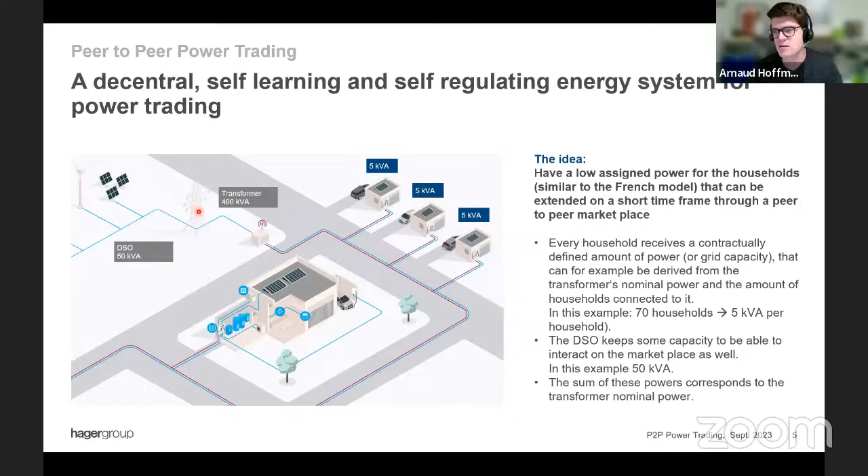And what we do now is that we install a marketplace. And as soon as one of the households needs more than those 5 kVA, this household needs to buy additional capacity, either from the DSO, if the DSO decides to use its power to put it on the marketplace, or, and that's the situation that is actually a little bit more interesting, from the other households.

So in this case, what happens is that you will have the ones who really need more network capacity because they afford a whole set of loads that need to be run. Those are the ones requiring higher network capacity. Those are the ones who will need to pay for this, and they will pay it to their neighbors who are able to reduce the required capacity. That's the basic idea that we put behind.

And of course, if there's no one selling capacity and I need capacity, either the DSO can jump in, or if that's not possible, well, that would mean that this household needs to do some load shedding by switching off an air conditioning and electric vehicle charging or whatever it is.

So a load manager would be, let's say, mandatory. Now, because this load manager will probably be the one doing all the transactions on the marketplace. We don't see this done manually, of course. This is something that needs to be run automatically by a load manager.

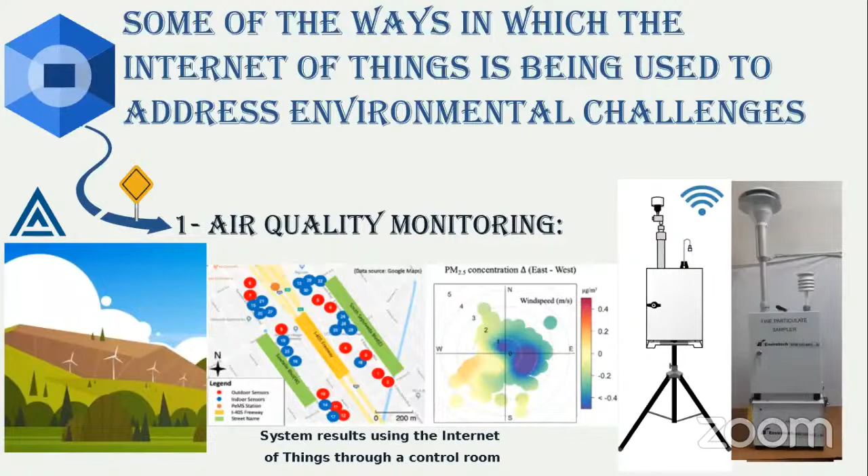هنا نحن ممكن نقوم بعملية أخرى بالتطبيقات اللي هي إدارة المياه. واحد من المشاريع الأخرى اللي تم إنتاجها هو جهاز يعمل وفق إنترنت الأشياء بمراقبة جودة المياه بالأنهار والبحيرات والخزانات، بما فيها الخزانات المنزلية، باستخدام عدة تطبيقات.

لذلك قمت بإنجاز وبناء جهاز يقوم بقياس معلومات مثل مستويات الرقم الهيدروجيني والأكسجين المذاب وعكارة المياه. قمت ببنائه لصالح مؤسسة دائرة المياه والمجاري عندنا في البصرة، واللي ساعد بجمع معلومات في الكشف المبكر عن تلوث المياه وتسهيل الإدارة الفعالة للموارد المائية.

عندما يمر الماء عبر الحساس فإنه يمر وفق الملف اللي تم وضعه داخل الأنبوب. كل تمريرة تنتج نبضة كهربائية، ومن خلال حساب النبضات في فترة زمنية معينة وحساب قطر الأنبوب المستخدم، يمكن حساب حجم المياه المتدفق عبر الحساس نفسه، واللي يقوم بإرسال كل نبضة للوحة التحكم.

قمت بتطوير هذا الابلكيشن باستخدام الـ iOS على الـ Xcode لتصوير البيانات وتنسيق رسم بياني دقيق، عن طريق الاتصال ببوابة الأمازون API Gateway اللي تعرض وظائف الـ AWS Lambda لجلب البيانات المطلوبة لعرض كل رسم بياني.

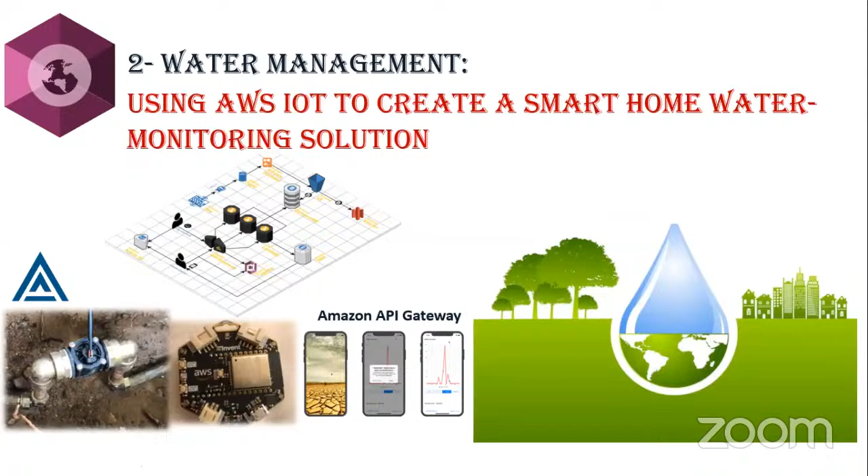النقطة الثالثة اللي نتحدث عنها هي إدارة النفايات. واحد من المشاريع اللي تم إنتاجها على شكل نموذج وليس تطبيق حقيقي هو مشروع سلة المهملات الذكية بالشوارع، تعمل وفق الطاقة الشمسية. وأخذنا بأحد المشاريع المركز الأول بأحد الجهات والمؤتمرات اللي شاركنا بها.

الطريقة التقليدية الحالية لرصد النفايات يدويا في صناديق النفايات أمر بالغ الأهمية وغير مريح، يتطلب المزيد من الجهد البشري والوقت والتكلفة، وهذا لا يتناسب مع التقنيات الحالية اللي نطمح لها لعام 2050. ولأن عملية إدارة النفايات من القضايا الحاسمة بإنشاء مدن ذكية، وبظل النمو السكاني الهائل، أنجزت بناء وتصميم

صندوق كبير للطرق تم تنفيذه لصالح مؤسسة كنموذج أولي، مثل ما ذكرت في البداية، واللي يتميز بنظام فتح باب ذكي.

ونفس اللحظة بنظام التصنيف الصوري للقمامة باستخدام التعرف الصوري، ونظام التلوث والبث الصوتي، بمعنى أنه على سبيل المثال لو اقترب شخص من الصندوق وحاول أن يرمي فيه راح يصدر صوت يقول اعتني بالبيئة.

وأكيد ما نسيت أن النظام يعمل بالطاقة الشمسية وتقنيات الضغط التلقائي الذكي، واللي يحل مشكلة قيود سعة سلة المهملات العامة. ومن النقاط الأساسية اللي استخدمتها نظام التعقيم الذكي، واللي يعمل على إزالة الروائح الكريهة والتعقيم وفقا لإعادة الصحة النظيفة ووضع أساس متين للصندوق.

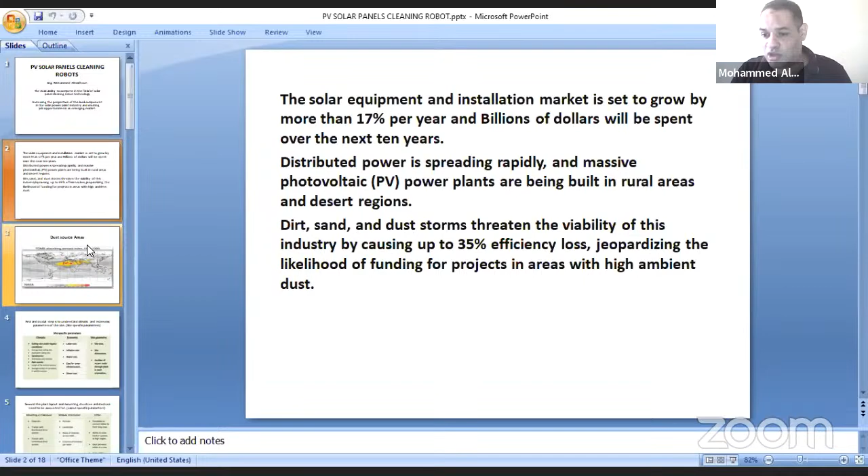فكان بنظرة سريعة على الوطن العربي بنلاقي إنه حسب الدراسات، أحسن مكان في العالم للطاقة الشمسية هو خط حزام الوطن العربي وآسيا. بس المشكلة إنه بيكون فيها غبار وأتربة كبيرة جدا، وهذه المشكلة بتأثر على إنتاجية الطاقة في المحطات اللي بيتم إنشاؤها في الوطن العربي أو شمال أفريقيا ومنطقة الخليج.

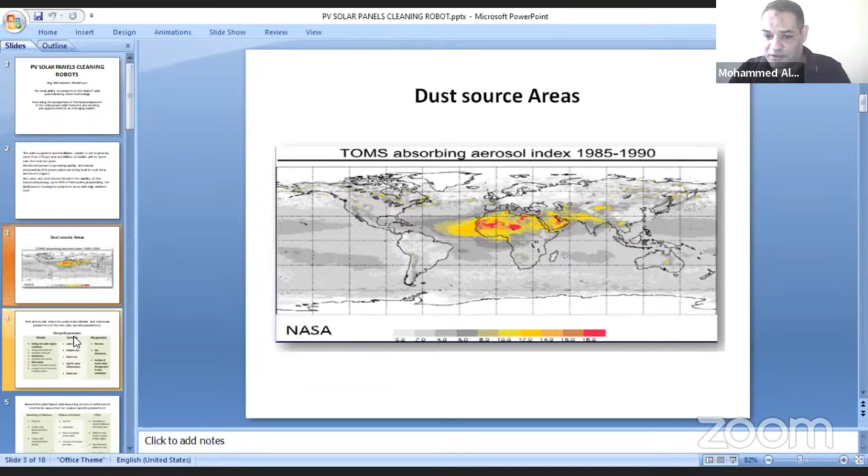وحسب الدراسات اللي بعض المعاهد والمؤسسات الدولية عملتها زي ناسا، كانت بتتكلم على أماكن انتشار الغبار والرمال. فكان نصيب شمال أفريقيا والخليج حصة كبيرة من انتشار الغبار والأتربة، باعتبار إنها أجواء فيها صحراء كتير.

بالنظر على إنشاء محطات الطاقة الشمسية، بنلاقي إن في عناصر أساسية يهتم بيها مصممو المحطات، وهي الطبيعة المناخية والطبيعة الاقتصادية وطبيعة الموقع اللي هيتم فيه إنشاء محطة الطاقة الشمسية.

فلو بصينا على الطبيعة المناخية، زي انتشار الأتربة والغبار في المكان، والعواصف الرملية ونسبة تكررها في العام، ونسبة هطول الأمطار اللي بتساهم في تنظيف الألواح الشمسية من الأتربة اللي بتتراكم عليها أثناء العواصف الرملية أو بشكل دوري يومي من الغبار اللي بينتشر في الجو.

والنظرة الاقتصادية بتكون تكلفة العمالة في التنظيف ومعدل التنظيف، عدد مرات التنظيف، تكلفة المياه، ووفرة المياه المستعملة في التنظيف. فبالنظر إلى هذه العوامل بنلاقي إن في حاجة لابتكار تنظيف بدون مياه، وهو التنظيف الجاف للألواح الشمسية، بيعتمد على روبوتات تستخدم فرش يتم استخدامها بشكل دوري، بحيث تقوم بعملية التنظيف بدون استعمال المياه.

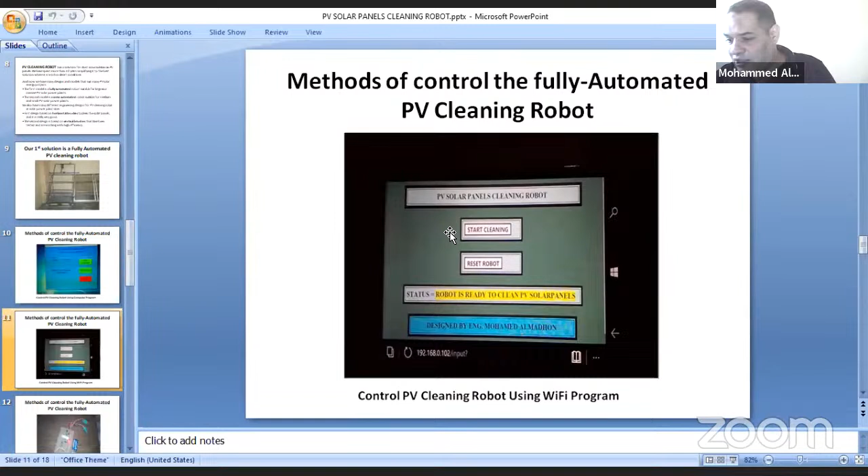روبوت بطول ذو فرشتين، كل فرشه منهم بطول 4 متر، وهذا الروبوت تم تجربته في احدى المحطات على مدار 4 شهور وكانت النتيجه رائعه. هذا الروبوت يحتاج لتشغيل عنصر بشري من خلال الازره التي يتم تركيبها، حيث انه يتم نقله من وحده الى اخرى.

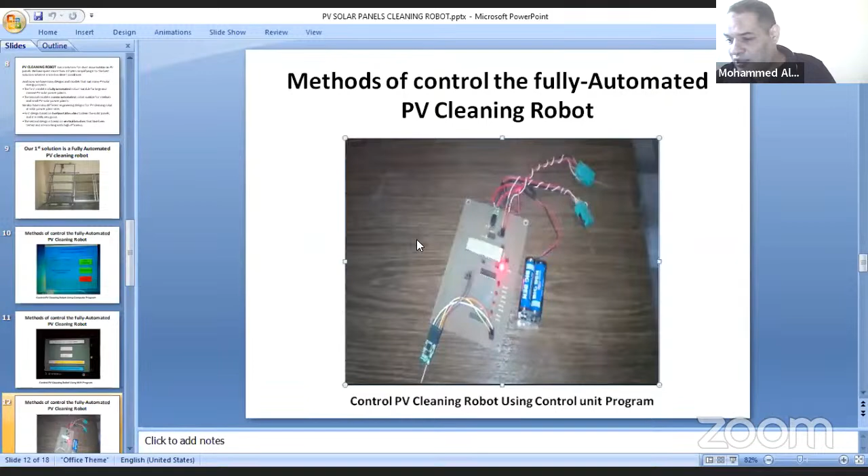من خلاصة التجارب اتضح أنه عنصر النظافة المستمر بشكل يومي للألواح الشمسية يعطي نتيجة مبهرة في التنظيف، ونظافة الألواح الشمسية هي عنصر مهم في نجاح أو فشل المشاريع الكبيرة في محطات الطاقة الشمسية، حيث أن كل ما كبرت محطة الطاقة الشمسية وتخطت مساحتها ال 20 ميجا أصبحت تحتاج لأساليب متطورة في التنظيف وتشغيل المحطة بخلاف الأساليب البدائية.

لأنه لو بصينا على التنظيف في حالة استعمال العمالة في المحطات الكبيرة نجد أن هنالك فارق زمني كبير في عملية العودة والوصول إلى تنظيف نفس المكان ونفس الألواح مرة أخرى في زمن قصير.

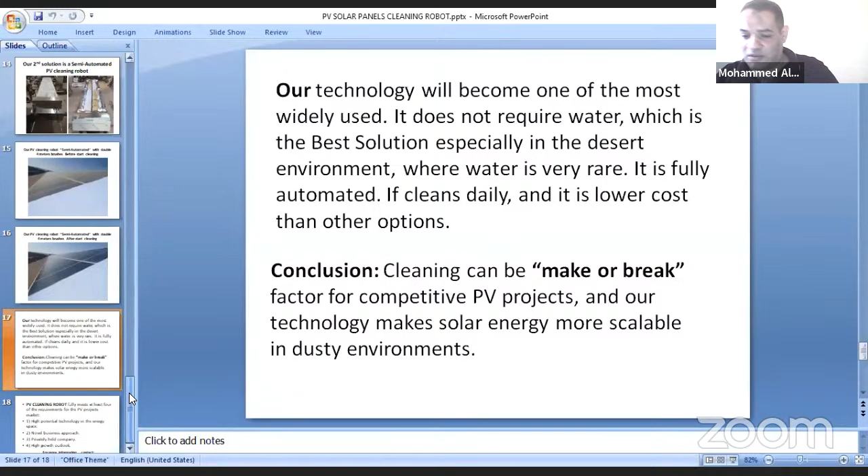ولهذا السبب استعملنا فرشتين، حيث ان المره الواحده تكافئ مرتين من الروبوتات التي تستعمل فرشه واحده. فبالنظر الى السوق نجد ان عنصر الروبوت اصبح عنصر مهم جدا في تعظيم الاستفاده من الطاقه المنتجه من محطات الطاقه الشمسيه والحفاظ على كفاءه المحطه في انتاج الطاقه المرغوبه فيها.

بشكل عام روبوت التنظيف الكهربائي يحقق شروط من متطلبات السوق التنافسيه والتكنولوجيا ذات الامكانيات العاليه في مجال الطاقه، حيث انها تستعمل تكنولوجيا البرمجه وتكنولوجيا الروبوتكس.

نهج العمل الجديد هو سوق جديد يعتبر سوق تكميلي في خدمه محطات الطاقه الشمسيه، وهو بند ذو اهميه في المحطه، حيث انه يتم اثناء انشاء محطه الطاقه الشمسيه الاخذ بالاعتبار وسائل التنظيف وتشغيل المحطة، ولذلك اصبحت ضرورة ملحة في محطات الطاقة الشمسية.

وتوقعات النمو السوق هي توقعات كبيرة جدا، وهذا مما يشجع الاستمرار في تصميم وتطوير روبوتات تنظيف الألواح الشمسية.

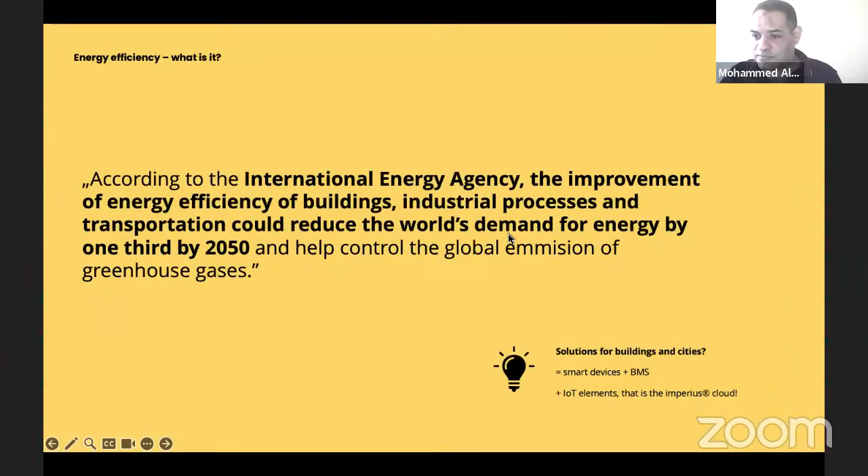Okay, so I will have the pleasure to talk about the technology and the project which I chose to present during our meeting today, about how you can integrate data from existing and newly planned and built buildings within the city. So what we are doing in general as a programmer and owner of the technology is transform data into knowledge, and this is our main goal.

So the presentation is about energy efficiency, facility management in the Imperius Cloud. As we can all feel, especially in recent years, energy prices are increasing, and there is a lack of energy in most of the countries who don't own fossil fuels to produce energy. This is the aim of our offer and our technology, and I will present our project which we have developed with City University of London in France, which will show how you can use advanced data analytics to improve energy efficiency for the city.

According to the International Energy Agency, the biggest potential for saving energy is in buildings, and improving energy efficiency can decrease energy usage by 20 up to 40% of the total energy used around the world.

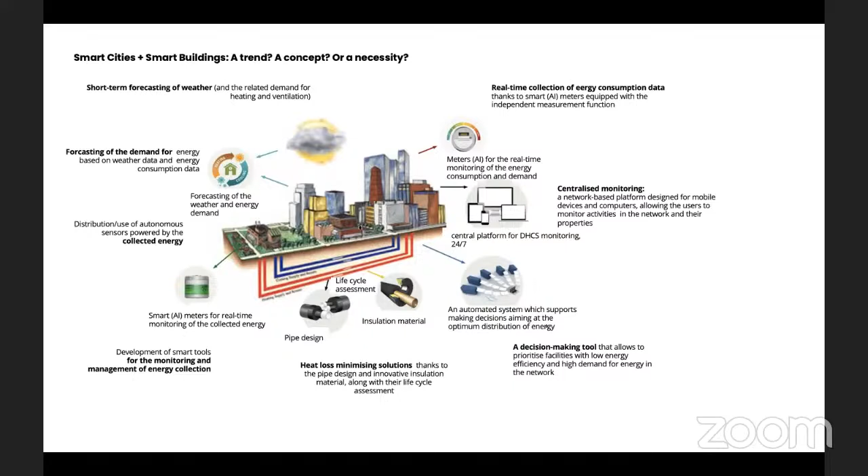And we are using artificial intelligence algorithms to predict the situation and conditions for the next 6 up to 12 hours, to make the right decision now and adjust the entire infrastructure in the city to the coming changes and conditions.

And within the project we are using our cloud platform, which allows us to integrate all different kinds of existing sources of information from buildings, pipes, grids, and we collect all that data into a unified data stream, on which we can provide algorithms that transform data into knowledge. Because now it's not a problem to collect the data - the problem is how to analyze data and make knowledge out of it. And that's what we are doing.

So the Imperius IoT Cloud is an end-to-end solution which allows us to connect any building situated anywhere in the world. I will also tell a few words about our project around the globe. And we unify the data stream.

And on the unified data stream, we provide advanced algorithms and tools which allow the operator or team of researchers to get the right data, the right knowledge from that data, and provide improvement of energy strategies, adjustment of devices and automation systems, and also predict how to improve and renovate buildings within the entire city or even the entire country.

And what is very important is that there's one platform which can interconnect all the buildings within one city, and all the buildings within various cities. So we have projects for specific municipal governments, but we also have some projects on the government level.

The question is always, why are we using this platform, and what's the reason to collect all the data from all different buildings in one place? The answer is, the more data you collect and the more structured way you can use it, the more knowledge and functionality you can build that's needed now and will be needed in the future. So some of the data is used now, and some is collected to give you the possibility to analyze it and make the right decisions in the future.

Here's an example of how we can also use the digital twin of the building. You can see each part of the building, and you can walk around the building as well. It's the newest part of the solution, but of course it's only for new planned buildings and state-of-the-art projects. In most cases, we integrate existing old buildings.

So the main goal is to interconnect different kinds of buildings within one building's portfolio and to be able to manage them in an efficient way, because we always tell our customers and partners that you cannot manage something you don't measure.

This is the project we developed for Montpellier city jointly with City University of London, Department of Mathematics and Informatics, which allowed us to improve the energy efficiency of the centralized heating and cooling system for the city.

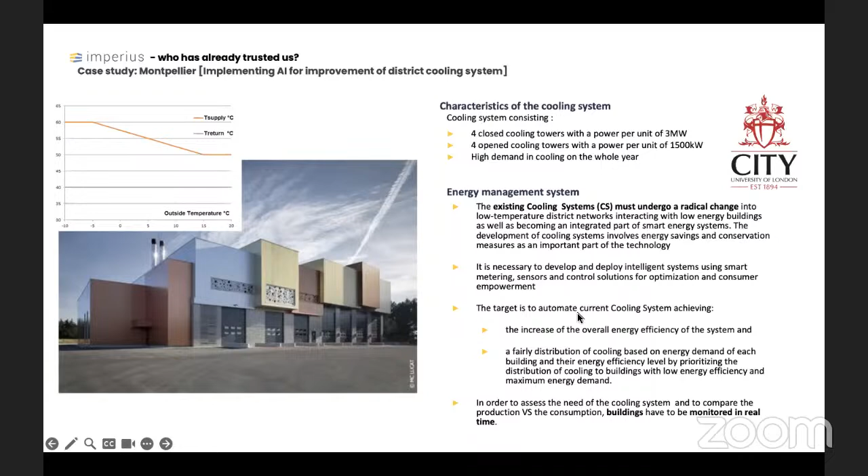The task given to our team was: can we improve the energy efficiency of the entire system? So the production, the distribution, and the usage by the facilities with the use of advanced algorithms. We plug into the existing source of data, the meters, sensors, and automation devices.

We started collecting data, and after 1 year of collecting data, we started to implement our AI algorithms. We started to simulate this new way of adjustment and new energy strategies for the source, distribution system, and facilities at the end. We built a new model for how the data should be analyzed, and how the different layers of the model should interoperate with each other.

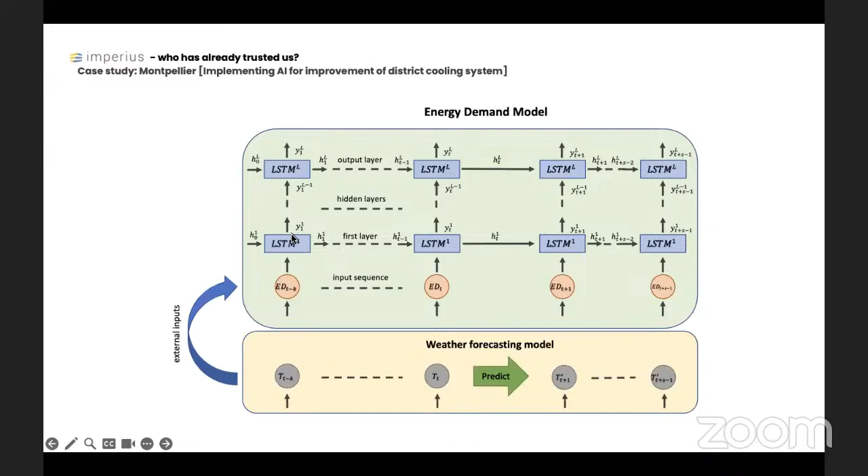At the end, we started removing outliers. After 1 year of work, we provided new algorithms which gave new setups and new hints for the operator. After 1.5 years, we started to outperform the operator.

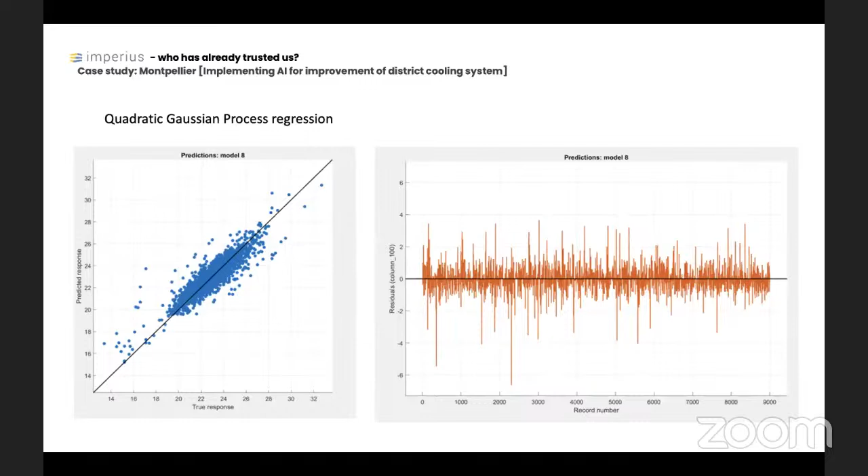So the algorithms achieved better adjustment of the entire system than the operator with 10 years of experience and knowledge. We beat the existing manual approach of analyzing and using data. At the end, we decreased energy usage by over 25% in this separate district of the city.

So the total savings are more than 100,000 euros per year, only by analyzing data and gaining new knowledge and providing new strategies on the existing system. We haven't improved any pipes or any part of the hydraulic system, we just analyzed data in a more efficient and better way.

In general, we work with most of the cities in Poland, but we also work with customers in 5 countries on 2 continents. We have customers in Canada, United States, France, and Slovenia.

What we are doing is collecting data and providing new ways to analyze that data. In total, now we are collecting data from more than 2,500 facilities in the world, and on average we reduce energy consumption by 25%.

The number of facilities gives us a big advantage on the market, because we are constantly building a new benchmarking database and knowledge database. From those facilities, we collect data every 16 seconds, all data about how they are working, how they are using energy and water, and how the installations are reacting to new set points.

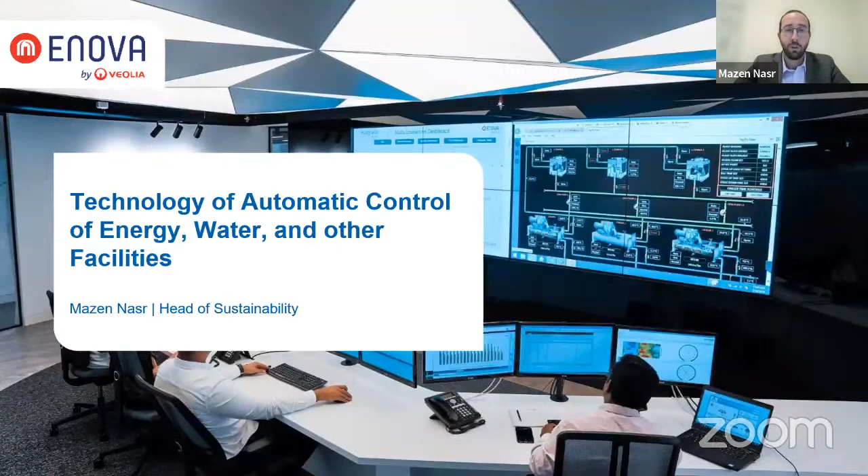And push the boundaries of the sustainability services that we offer here in Enova. So I'll first set the stage with some details about the built environment. It's just some statistics and figures that I will not dwell into. I think most of us are already familiar with those.

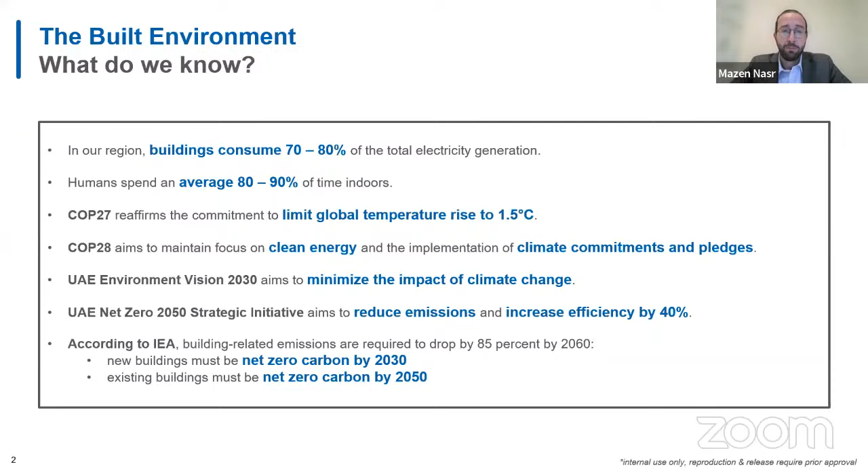And we all know the importance of why and how important it is that we reduce our emissions and impact on the environment, and also to highlight that we're lucky to be in this part of the world where the leadership is setting very ambitious visions and targets which are in line with global efforts to preserve the planet. And it has been proven time and time again that implementing these visions and initiatives will no doubt reduce energy and water consumption, as well as conserve natural resources, improve air quality, water quality, preserve our health and well-being, and enhance the quality of life.

So with that said, this makes the sustainability activities in Enova very important. We're all trying to make a difference, make an impact, and make a living at the same time. So here's what we're doing in Enova.

I'll first start by introducing a concept labeled Hubgrade. It is Enova's live data monitoring center, which brings together processes, tools, and people skills to identify opportunities and areas of optimization from data that we collect from the facilities. Essentially, it's built on the idea to bring together technology and human skill for the purpose of environmental and operational efficiency.

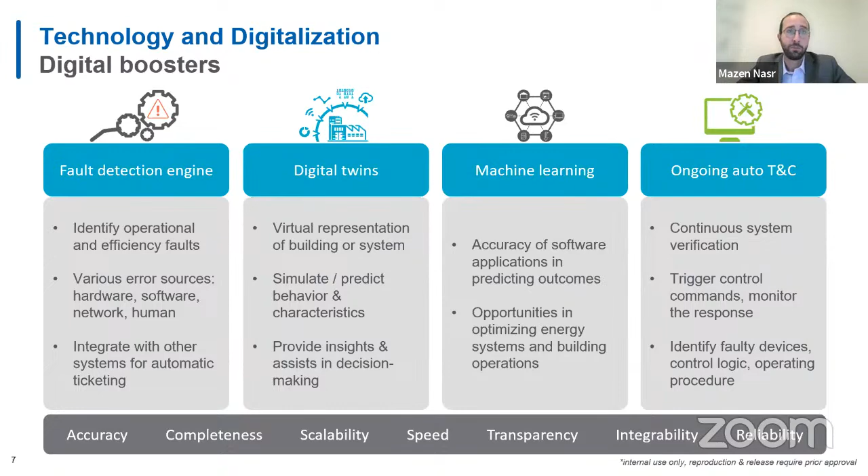So now at Enova, we use these digital boosters in the playground of our service offering, if you want to call it that. We've equipped our digital boosters with the right infrastructure, high performance cloud databases, and backend infrastructure to allow for easy and efficient deployment.

I'll start with energy performance contracts, which I spoke about earlier, one of our major services at Enova. Typically when we approach a candidate facility with an energy performance contract model, we target a certain return on investment or payback based on the client's condition. While there exist multiple channels of financing, the underlying concept is more or less the same: there has to be an investment from some party in return for a reduction in energy costs.

But now the digital boosters have stepped in, and we've greatly enhanced the performance of our EPCs by identifying faults and potential improvements within minutes of their occurrence. As we spoke earlier, every 5 minutes we're doing automatic fault detection, and thanks to digital twins, machine learning, and continuous commissioning, we're able to uncover potential for a lot more savings than what we previously identified during the initial stages of the study.

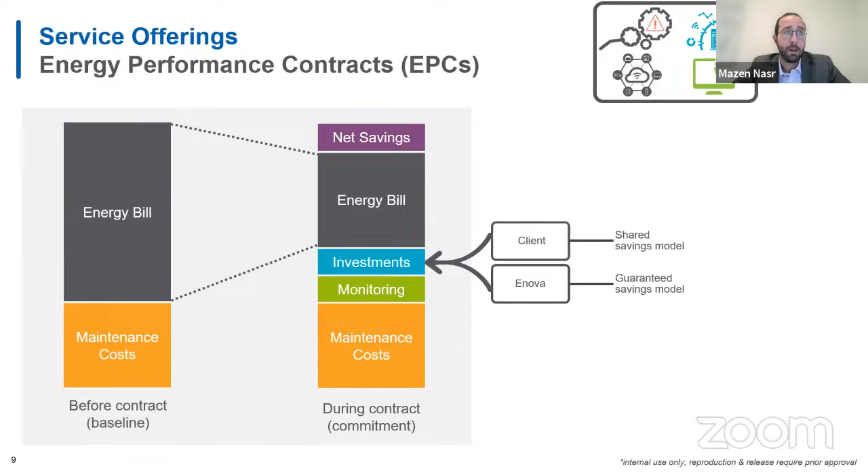Next is solar PV, obviously a very hot topic in sustainability. Just like energy performance contracts, there are different business models that govern the landscape of renewable energy. But despite the differences between these three models, the requirement to generate electricity as efficiently as possible is common across all three. Which is why we deploy, again, the fault detection engine to ensure that all the strings within the PV system, the inverters, the equipment, the generation in general, the voltage levels, the DC and AC sides, are all performing as expected, and that the cleaning activities are triggered at the right time.

I'll move on next to indoor environmental quality, another one of our service offerings. We're also capitalizing on our digital toolbox to ensure that the indoor environmental quality provides a safe and healthy space for facility occupants. We can provide a variety of tools and sensors to monitor indoor conditions, along with full reporting, analytics, and alerting as well.

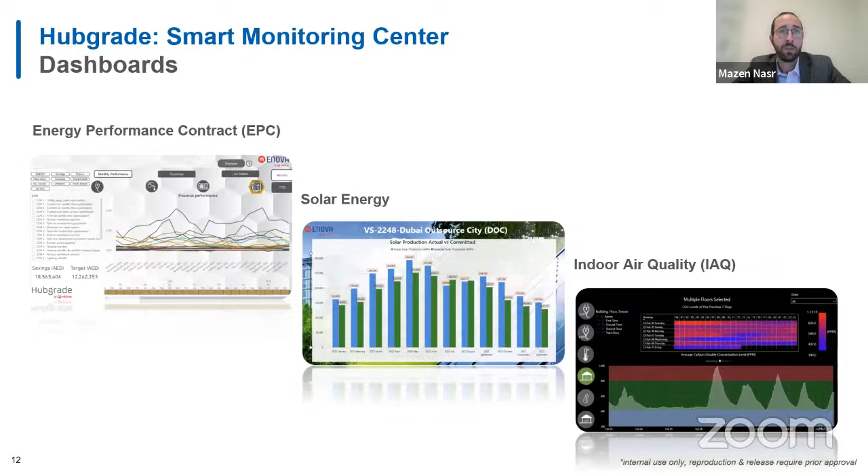So moving on to a quick overview of the achievements. I'm getting a bit tight on my time window, but to date, starting from 2017, we have achieved - we have exceeded 470,000 tons of CO2 emissions reduced, cumulatively from 2017. That is equivalent to a little bit over 100,000 cars driven for an entire year. Let me put that in perspective: that's roughly 5% of the cars registered in Dubai. So 5% of the registered cars in Dubai parked on the side of the road for an entire year - this is how much CO2 has been reduced in the portfolio that Enova is managing.

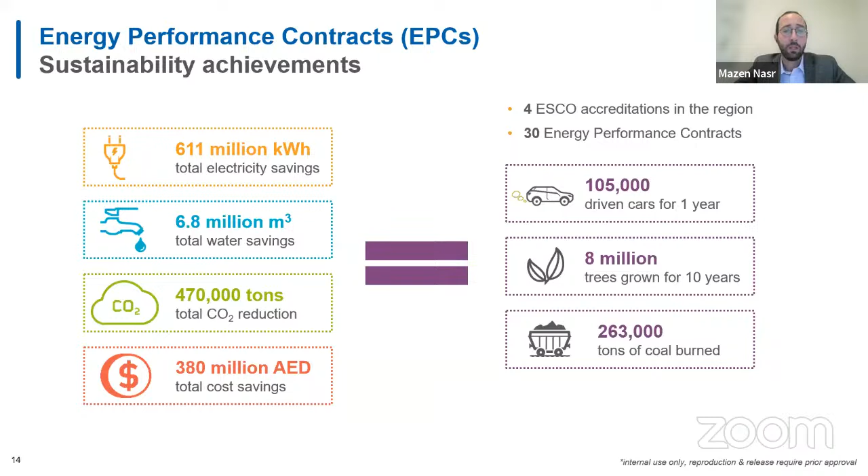So with that, I want to move on to the solar portfolio as well. We've completed so far 39 solar projects in the region - 28 in the commercial sector and 11 in the industrial sector.

And with that said, I just want to wrap up with one final thought: the technology we're using is simply a tool to help us reach further, to make a bigger impact with the activities we're undertaking, but it ultimately comes down to all of us working together to address the climate issues our world is facing today. Thank you very much for your time and attention.

I'm happy to answer any questions if you have.

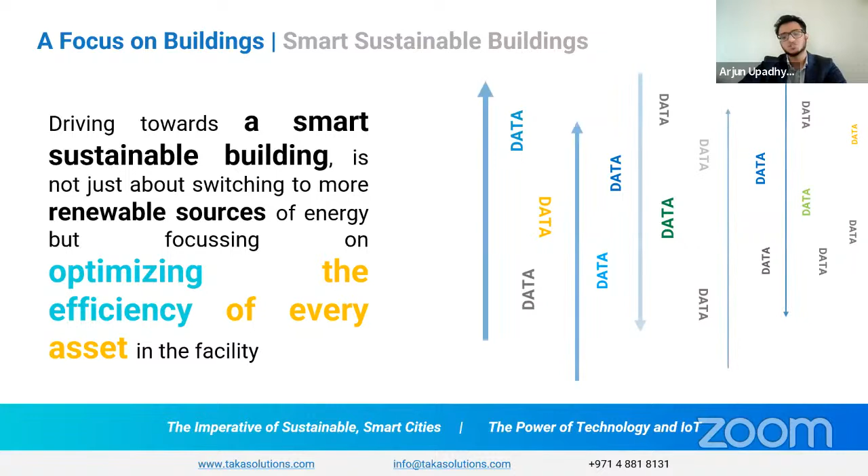Everything relies on data that we receive from every asset, from every facility, from every sensor installed at that particular facility. When we look at smart buildings, it's all about leveraging technology. And as TAKA, here in UAE, one of the key elements is the HVAC systems, the cooling systems, which include the chillers, the AHUs, and so on.

But there are obviously a lot more other assets that we actually connect to in a building: water tanks, pumps, cooling towers, occupancy sensors, lighting systems, irrigation systems, LPG gas tanks, and so on. So we are able to connect to each of these assets in a facility, and leverage multiple technologies on top of that.

So IoT, I will get into each of these shortly, but all of these are then connected to the cloud, in which we leverage a lot more technologies such as AI, blockchain, BIM models, digital twins, and so on, in order to drive the agenda of energy efficiency.

Now what really happens here is IoT is really the basis, it's really the concept which defines connectivity from an edge device to the cloud for monitoring, analysis, and controlling. This is really the first step that anyone needs to take if they want to make their building smart. You've got to install your sensors, make sure you have the right gateways. And now there are multiple ways in which data can be transferred to your cloud application.

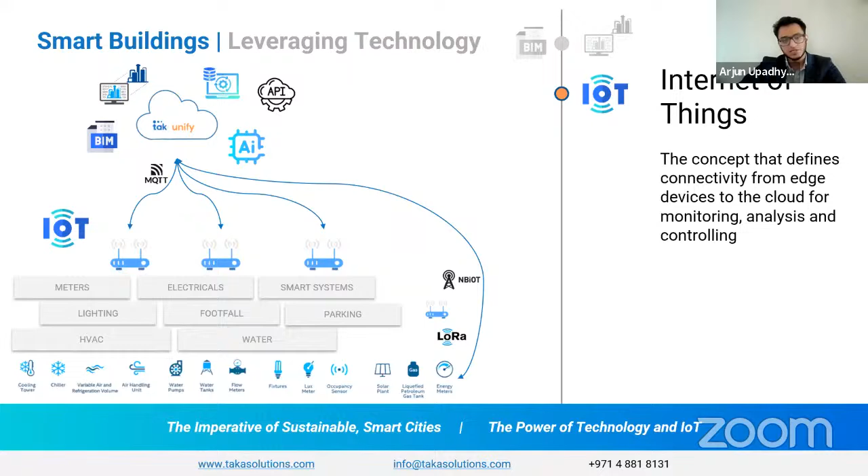With all this data that we collect, the next part is to start analyzing that. And what really happens here, as highlighted by the previous speakers, is we use something called BIM and digital twins. BIM is the building information modeling system, and digital twins enable us to simulate what really happens in a particular facility.

As Taka, we collect about 1.3 million data points on a daily basis. Some of them are on 15-minute intervals, some really go down to a minute basis, depending on the use case we have. Once we do all of the BIM modeling and set up the digital twins, with all of the data accumulated, big data analytics and AI come into play.

The idea of using this, primarily as Taka, is to augment our human decision making. As Taka being an ESCO, we have our M&V teams who monitor, verify, and measure all of this data, and who come out with energy saving measures or conservation measures which can be implemented in a facility.

AI helps us augment that, to push this further on the basis of data, to identify patterns, to model all of this, and to suggest what can be done, and to dynamically change set points, for example, within accepted parameters on a real-time basis. So we're shifting away from basic schedules, which used to be there before, to dynamically changing it based on multiple factors, based on the results that come out from AI.

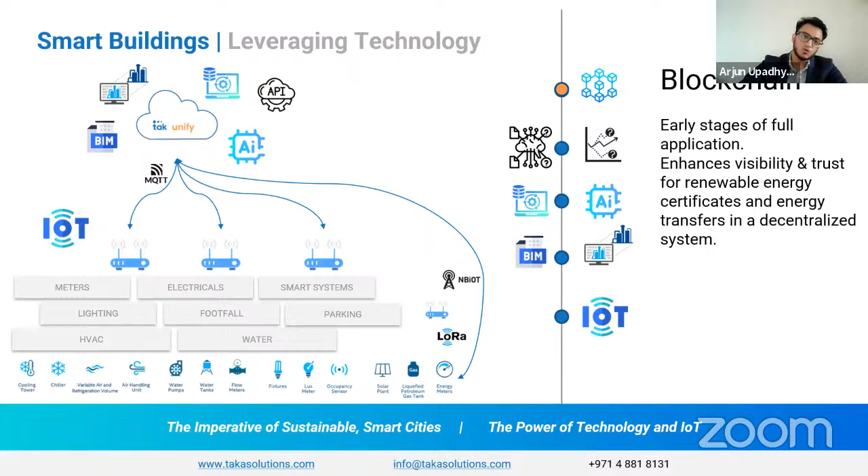Its application is quite early, it's in its early stages. Primarily, this is being used in renewable energy certificates, energy transfers, in a decentralized system, and it's primarily used on the solar side.

Now, the difference between smart buildings and smart sustainable buildings - there is a key element here. Smart buildings can be done by installing all of the technology which we've gone through. But in order to really make a building a smart, sustainable building, a key thing here is collaboration.

And what do we really mean by collaboration? Collaboration comes from policies, from external collaboration between the government agencies, the different organizations which are there, the MNCs, so on and so forth, and internal.

When we talk about internal, this is something which we have, as TAKA, identified with all of the facilities which we have audited, the energy efficiency measures which we have implemented. The key thing we have identified is that there's always a disconnect between three key departments in an organization. Business has its own objectives, sustainability teams have their own objectives, and operational teams, the FM teams, have their own objectives. Each of them usually has been identified to be working in silo without seeing a holistic picture of the entire operational part of it, and each of their objectives really to be met.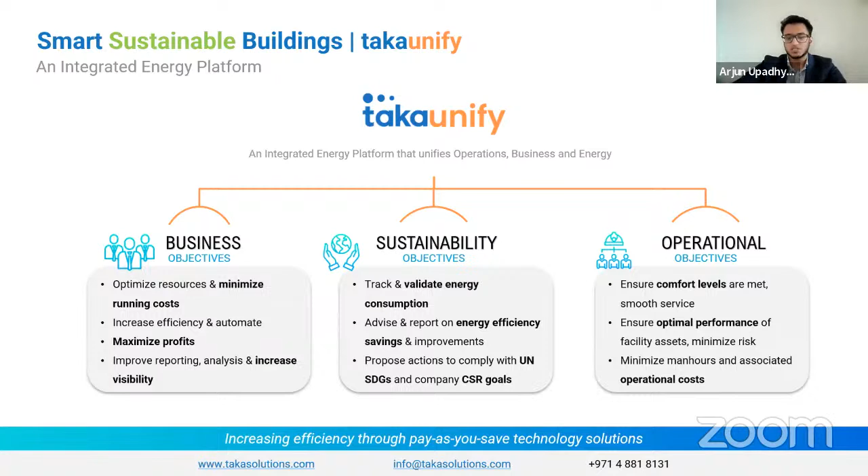So what we really do at Taka is we try to unify all of those objectives into one integrated energy platform, and we have a set process as to how we go about getting a company or a facility to really be on track for achieving a certain level of energy efficiency.

The first thing we do is we have a system called the utility bill management system. It's very important to identify how the facility has been performing. If it's a new facility, great, you get to actually install meters there and start gathering real-time data. But almost 80% of facilities which are going to be constructed are going to be there for the next few years, or have been there for the last few years as well, so it's important to understand how they've been performing thus far.

The utility bill management system enables that to happen, wherein, in a click of a button, we're able to extract all information from historical invoices and project that to give pretty much an analysis of which fuel type is being used, when have been the peaks, the drops, and the performance of the entire portfolio as a whole. Once that's been identified, we then get to the real-time metering.

So we now know the performance of it, and we're able to figure out certain baselines. Then we get to real-time metering, where we install meters. We have our own gateways, or we can work with other gateways, in order to transmit this real-time metering data from the MDB, SMDB levels all the way up to our platform for further analysis and to feed all of the models and the knowledge base which needs to be there.

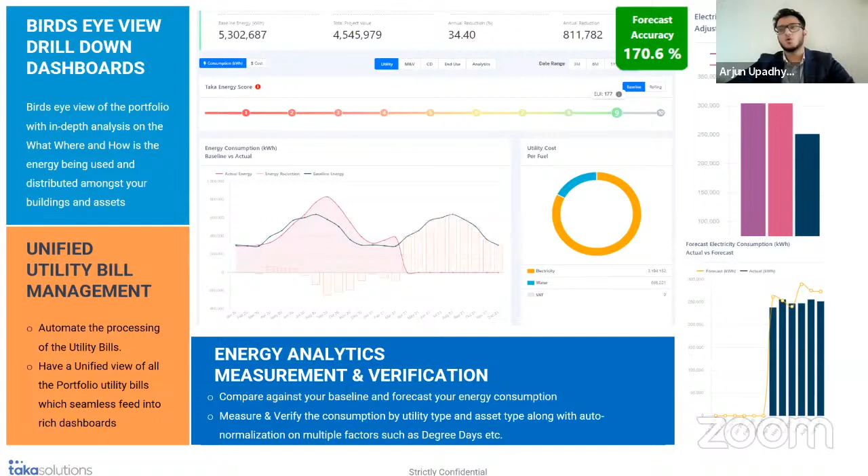Now, a few quick snapshots through our platform really give you the ability to see a bird's eye view, drilling down all the way to the bottom. The UBMS module gives you the ability, in a click, to really analyze how you've been performing to date. Energy analytics and an M&V tool is a key part of our platform. Again, we being an ESCO, we use our own platform to try and leverage and deliver all sorts of energy efficiencies for our customers.

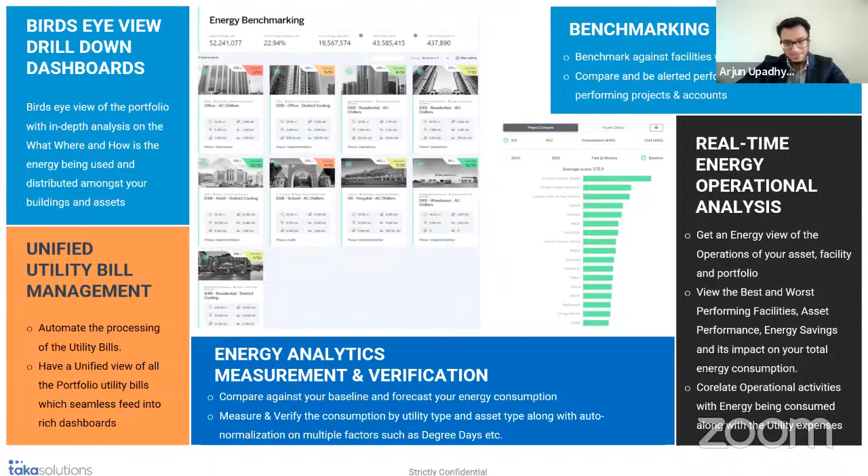Real-time energy operation and analysis is in place. As I said, we benchmark which facility is internal as well as external, and we really provide an integrated energy platform for our customers, making sure that business, sustainability teams, as well as the operations team, can all use one platform and really understand how each operational part of it has an impact, not just on the cost, but also from an energy consumption standpoint.

Now, what are some of the key things one actually has to look at when looking for an energy platform out there, or to leverage technology to reach a certain amount of energy efficiency? There are quite a few systems which are out there, so it's really up to a couple of things which we as Taka have identified. The first thing is platform availability.

It's very important that your platform is available almost throughout the time. At least it has to be up for 99% of the time, because if your platform is up, you can make sure that your analysis is on track.

Vendor agnostic: you should move away from anything proprietary to really open up to multiple protocols. From the field level, it should support protocols like BACnet, Modbus, MBus, and so forth, as well as transmit that data up via MQTT or other IoT technologies, and transfer the data to third-party applications via APIs. It should be open and completely vendor agnostic.

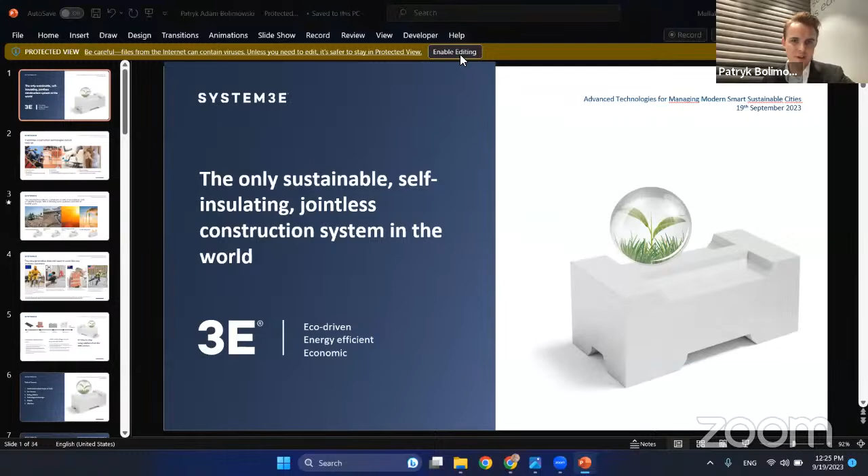Oh, it works. Perfect. So we can leave it like this one.

System3E is about sustainability, a self-insulating jointless construction system. This is the only system available to customers in the world. If you could go to another slide, the second one.

As I said, you will all agree that smart cities are not only about managing our energy, water, and whatever is needed to live in such a city. It's also about the technologies we use to build our new buildings. And thinking about traditional technologies, we usually pour concrete, glue some elements, use some water to construct such objects. Also, we can find some technologies based on 2x4 with insulating materials.

All of these are actually not efficient at the initial stage. So as a result, the construction industry strongly contributes to climate change, and we all see the problems.

Our technology is competitive in terms of decreasing environmental pollution. We save water. We also created a material that is thermally insulating and generates less greenhouse gas emissions, not only at the production stage, but also for new buildings, because all of its characteristics contribute to creating a good climate in terms of warmth, acoustics, and everything that contributes to your well-being.

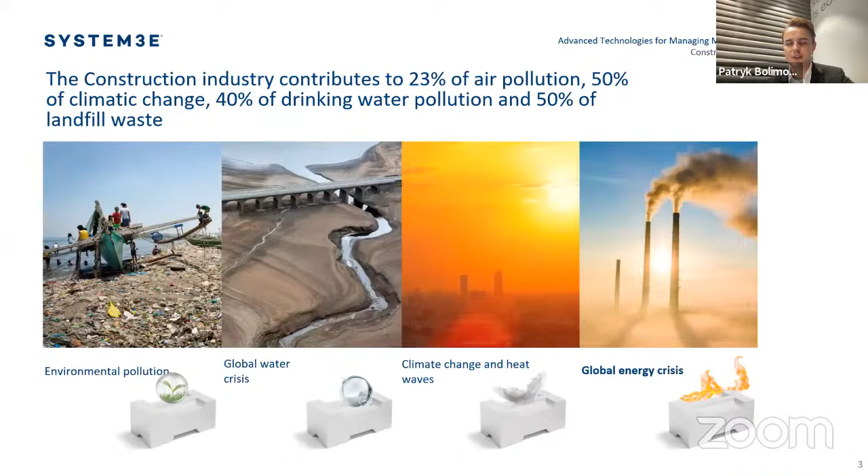Go to the next slide, please. We did some market research, and we know that the construction industry all over the world has the same problems: labor intensive processes and operations, processes that are usually done outside. So when it's sunny and hot, or when it's cold and windy, that all causes problems.

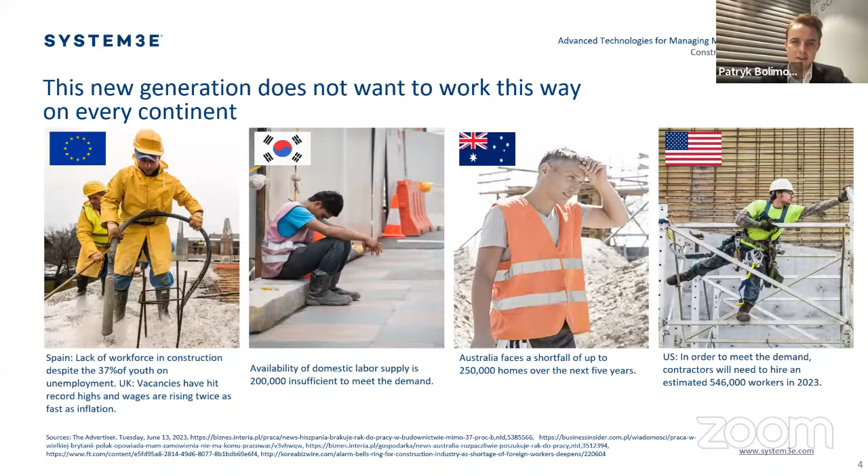Go to the next slide, please. It also contributes mostly to your expenses.

In 2023, we came up with this new solution, called System 3E. It's actually innovative because we combine a smart shape that gives you the possibility to erect your building in Lego-like fashion. We use perlite as the base material, which is a volcanic rock sourced from the ground and expanded. It's lightweight, and it gives you all the properties with thermal insulation, acoustic effectiveness, and it's also fireproof.

We also have an advanced production process, because if you think about Lego bricks, you have to ensure that all of them are high quality and have the same dimensions. So we cannot use blocks with different dimensions. Our production process is so precise that each element we manufacture is alike, and they assemble perfectly.

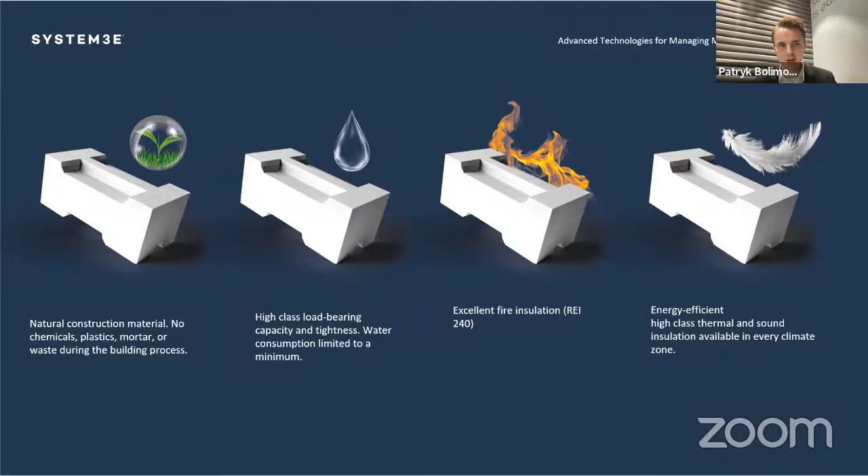This technology is also fine to combine with other smart solutions like HVAC systems with IoT sensors, and it's perfect to be optimized to deliver any standard you need. At the end of the day, we also showed that to our customers because we've already built about 100 new houses out of this material, and we showed that with less expense, you can get a higher energy standard. Go to the next slide, please.

There was only one structural and insulating element made of perlite. This is the source of our properties. It's actually a common material that you can find in many countries. It is a volcanic rock. Most of these raw materials you can find in Turkey, also in the Balkans, in the United States, and also in GCC countries, if you can find some sources.

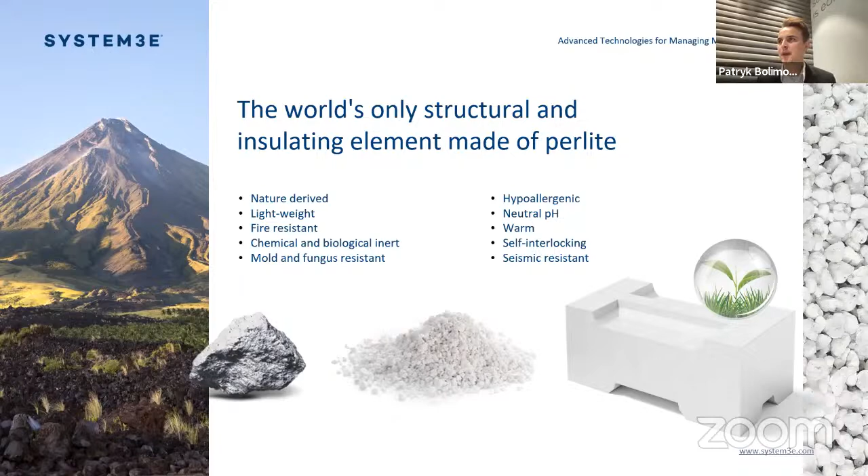In the future, we're thinking about expansion of our business model, not only manufacturing in Europe and exporting our product, but setting up new factories in different countries. So we also consider GCC regions and bringing this technology closer to the society. Please go to the next slide.

But the key thing is that you don't have to use perlite to manufacture such a fancy shape. You can use some standard concrete, or materials based even on oil, like polymers. So you can fit it to your solution. It's not a limitation.

The key feature is that the shape gives you the possibility to dry stack your building. At the end of the day, we have a dry stack construction, and to the best of my knowledge, this is the only dry stack construction material available globally. So this is why it's so interesting.

Assembly - we already proved that using this product, you can save about 25% of your expenses on construction. So it's quite a lot.

No synthetic insulation, but the version we designed in Europe, because the European community, as well as GCC countries, is aware of the need for sustainable development. Therefore, only green technologies are necessary to be present in the market.

Eco-friendly construction by reducing waste, because you don't have to put an ETICS system on the outside. I mean the thermal insulation - you also don't include these elements, so you reduce the amount of mortars used on your construction. The whole process is getting greener. Go to the next slide, please.

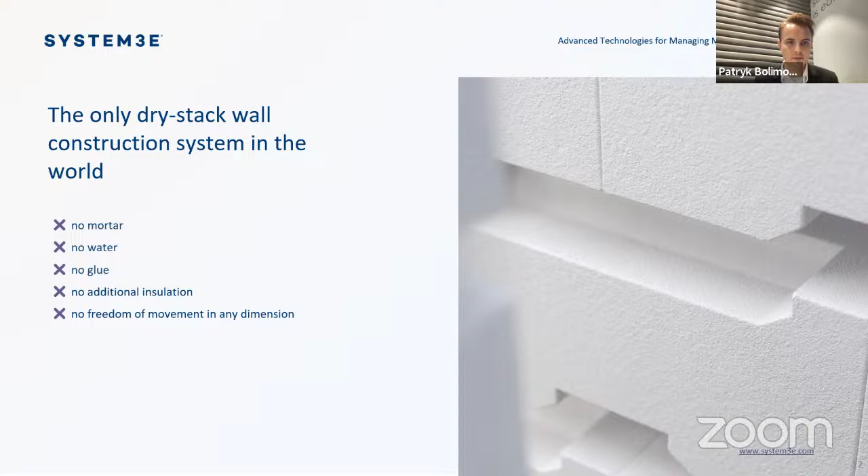The system is modular. I think this is quite important today, because mostly thinking about tools that you use to design your building, like BIM tools, building information modeling, designers usually struggle with ordering or choosing the right construction materials for your building. So our elements are unified. We have BIM tools helping designers to design such buildings and optimize everything that is necessary. Also, calculating the number of elements is made simplified by using such tools. So it's actually integrated pretty well with the design methods and techniques used by designers globally.

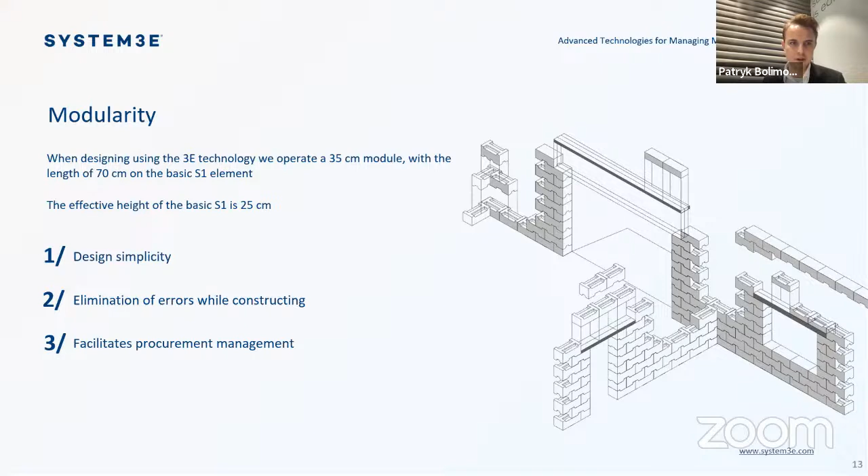Please, next slide. Our IP is covering most of the developed world, and we're also thinking about expanding to countries like the USA, China, India, and also GCC countries - places where sustainable development is happening.

But as I said before, we can use any material to manufacture such a unique shape, independent of local requirements and technical approval for such a building. We can use different materials and source them locally, so the value chain is simplified and getting cheaper as well. Go to the next slide, please.

Next one, this is only the table of contents. Here is the whole ecology coming with the product, just to give you some heads up. Two-thirds lower carbon footprint for one square meter, but thinking about the whole building it's slightly less. 100% of perlite waste can be recycled. So we're talking about a circular material - after the whole life cycle, this material doesn't end up as waste.

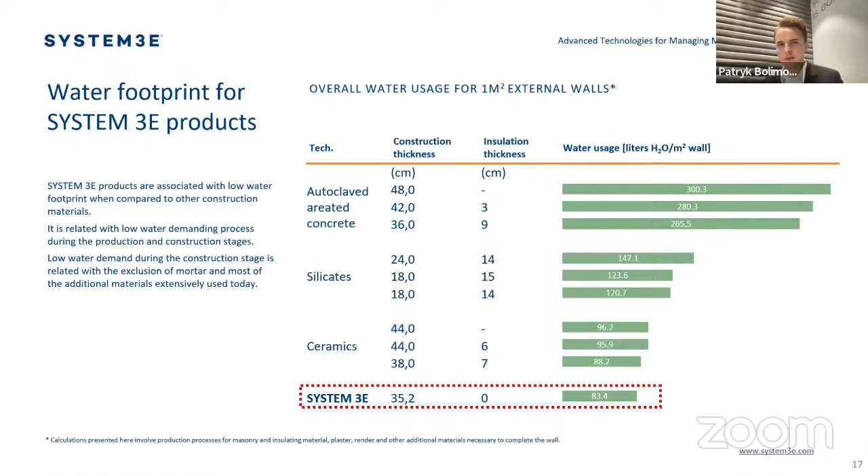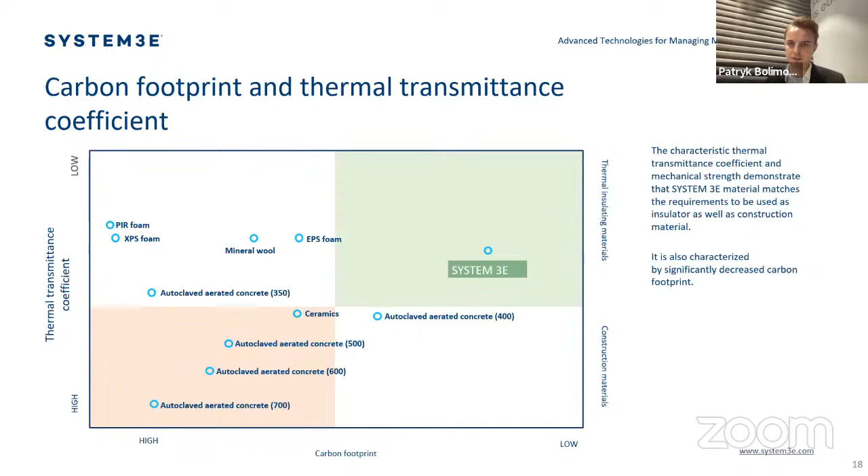In the next slide, you see the carbon footprint of our solution compared to other popular wall types built these days. System 3E is a single leaf wall, so you don't use any ETICS system on the outside, no EPS insulation, no mineral wool. What's happening in the industry today is they take autoclaved aerated concrete or ceramics and add XPS foam or mineral wool on the outside, and combined this gives some thermal transmittance. System 3E is right in the middle - it combines both load bearing and thermal insulation properties with little carbon footprint compared to other materials.

If you use such technology as a single leaf wall - and it doesn't matter if it's our technology or another one which is glued - the waste is reduced to an actual minimum. Comparing our technology to building a house with traditional technology, we can reduce waste generated on the construction site by 80%. Compared to other single leaf walls, it's about 40%. We're talking mostly about waste from the chemistry used to glue elements, scraps from ETICS systems, and packaging related to delivery.

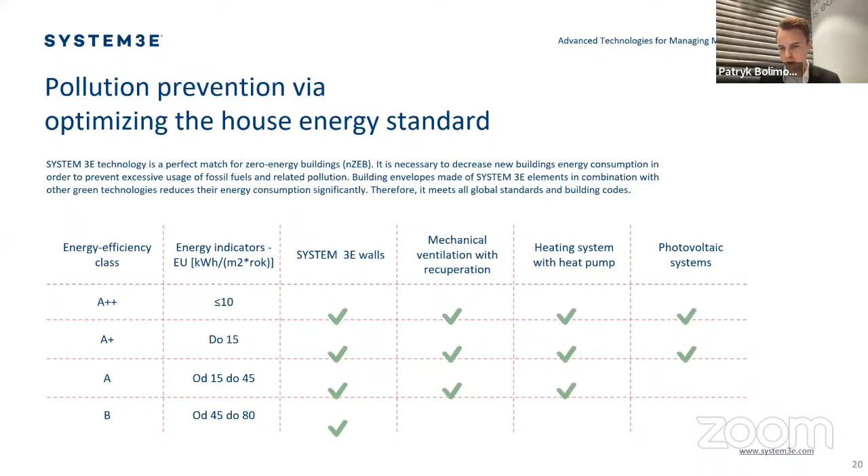All of the advances, just to give you a heads up - this is the thinnest and warmest wall available in the market globally among products these days. Compared to other materials, you'll see it's not necessary to insulate it, and with a thickness of 35 centimeters, this is quite - well, it's not much.

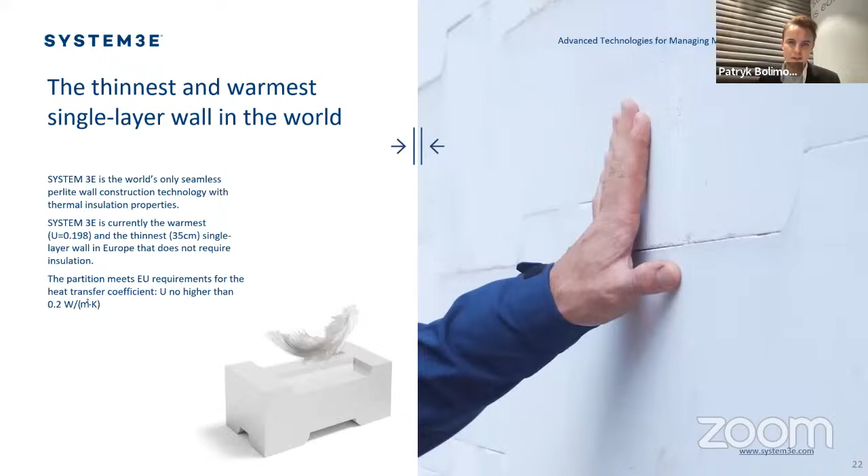Next one - this is a comparison. It's anti-seismic as well, because when the technology is assembled, it's not glued in a traditional way, it's joined in a Lego-like fashion. So all the properties of the finished wall are not governed by the connection between mortar and building element - we show that all properties of our walls are governed by the material properties.

If you talk to your construction designer, I'm happy to share technical data on how these walls perform in practice. The construction designer will say this is true - properties like compression strength or strength against loadings like wind are governed not by the connection between elements but by the material properties. That's something different construction designers usually have to consider in the industry. Can we go to the next one?

It's a comparison for you between some standard technologies, not only standard bricks, but we also have many advantages compared to frame construction or modular construction. In contrast to those methods, you don't have to use materials that can only be assembled on the construction site during nice weather.

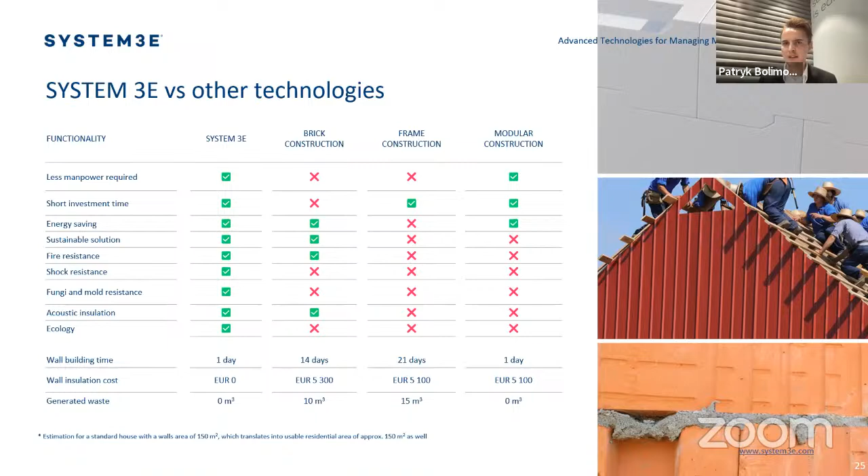With modular construction, you need heavy machinery to bring all the elements, but with this technology, it can be assembled by standard workers with no qualification. After some short training it's so simple—we've proven in Poland, Spain, and the UK that people with little training can use this material in practice, and you don't need any heavy machinery.

This gives you many benefits for your construction operations. With a single family house you can save about 25% of operational cost, and we've shown the same with commercial buildings. Finishing a construction object sooner means you can start selling your products quicker, so whether it's a house or a commercial building, the service becomes available to your customer much faster.

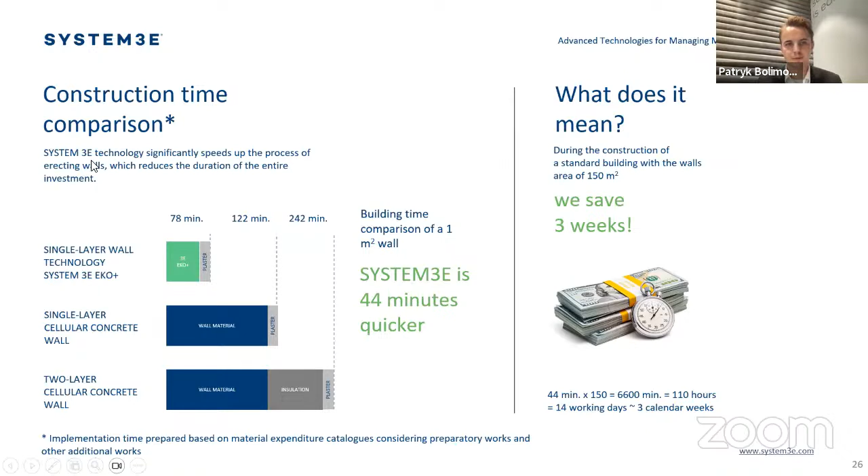We cooperated with one of the biggest chains of grocery stores and built several Lidl discount buildings across Europe. We showed that you can shorten delivery time for such buildings by 20 to 25%, independent of other conditions and logistics. This gives many benefits once the building is operating, because you make it available to your customer much quicker.

As for what we're planning in the future, we want to expand into many countries. We've initiated first talks with Canada and the US, and we're already present in Europe. We've also started initial talks with representatives from GCC countries. So far we've delivered our material to most countries in Europe, as well as Korea, Japan, Turkey, Greece, and the US. We haven't done so in the GCC yet, so if anyone is interested in trying this technology, we're happy to talk about it.

Here are some examples of what we've achieved so far: over 160 completed projects in Europe, including single-family detached houses and commercial objects. This shows that you are not limited to simple objects—you can build complex buildings with modern functionality, so it's fine to go with any type of building you wish.

If you want to know more about our activities in Europe and what can be done with System 3E, including the real benefits in practice from our experience, you can find us on our social media—all the links are in this material, which I'm sure will be shared with you.

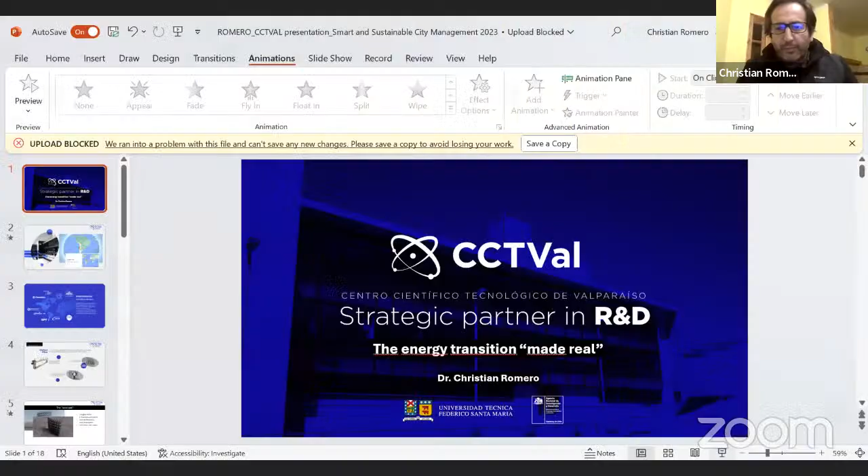So I hope you can see me. Good morning to everybody, or good afternoon. Yeah, perfect.

My name is Christian Romero, and I am a lead researcher at CCT-Val, the Center for Scientific and Technology Development in Valparaiso. I will talk to you about what we have been doing and mention our success case. I think it would be interesting for other people to learn about this.

CCT-Val was created in 2009, and its main endeavor is research, technological development, and innovation. For people who don't know where Chile is, there it is, and Valparaiso is a coastal city, pretty far away from wherever you guys might be right now.

We started off as a nuclear science research center, so we have a lot of collaboration with nuclear science labs around the world where we develop technology for them. We also started working with composite materials, in this case carbon fiber, to harvest different kinds of renewable energy sources that might be available wherever you live.

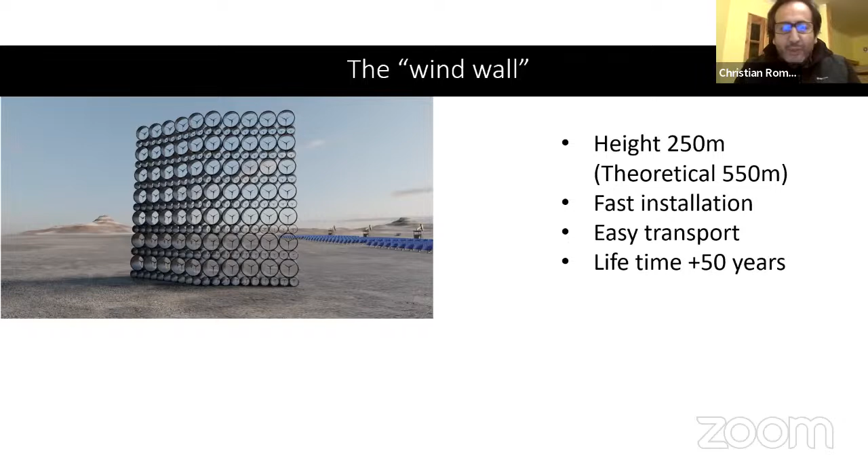So we developed this aerodynamic ring that increases the power output by up to 30%. We've designed a modular construction system so you can assemble these windmills like Lego. It's very fast to assemble, can go very high, is easy to transport, and built to last 50-plus years.

So this is one concept, but what I want to show you more in depth today is the CHEX system. It's a renewable energy storage system.

I will explain to you why we need to store energy and what the problems are in Chile that we are solving with this technology. This technology was developed at our center. It has now gone to a spin-off company, and is now patented in Chile, other countries in Latam, and 20 countries in Europe. So we're expanding the reach of this technology.

As you guys probably know already, the problem with renewable energy is that it will produce energy whenever it can and not when you need the energy. So this production creates a lot of conflicts with consumption.

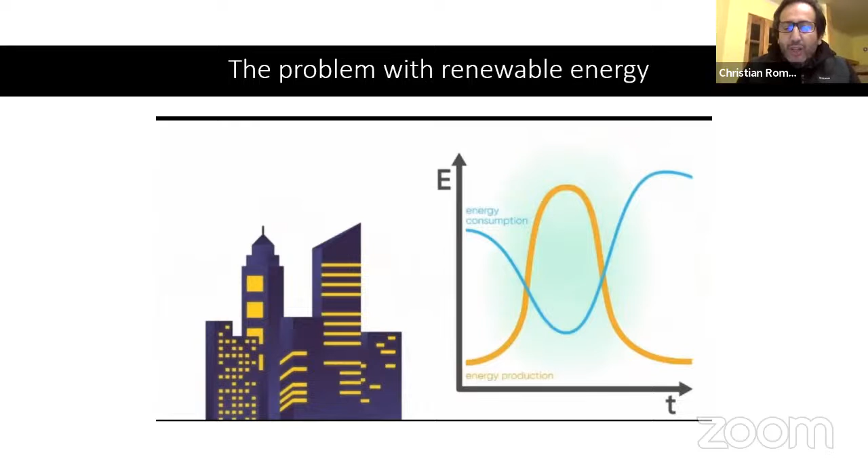In our case, in 2022 in Chile, we had so much spillover that it was the same amount of energy that was generated with renewable energies the year before. So this is becoming a real problem, and countries that decide to go into renewables really strongly will have to deal with or face this problem.

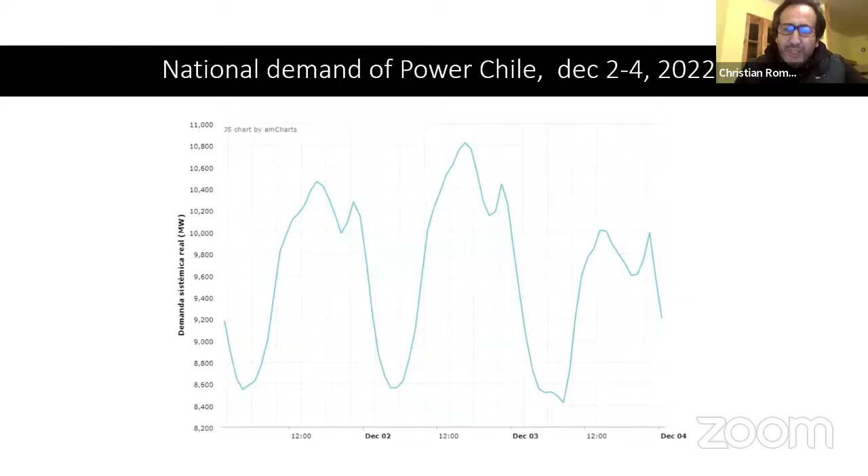So what I'm showing here is the national demand of power between December 2nd and 4th in Chile. There's a lot of oscillations, and what you see is that people, companies, and the country as a whole, the grid as a whole, does not have a constant energy demand, and this presents a lot of problems for the regulators. And the regulators have tried to do almost everything.

This presents a real big issue, and the issue is that most traditional solutions go to some kind of mitigation. Now that you have renewable energies, you can try to balance it, monitor and lower grid instabilities, have a strong ramp-up power supply, and try to peak shift. So these are all renewable energy mitigation solutions, and we believe this is not a solution at all, it's just a mitigation. This is just an example of the traditional solutions.

From our point of view, being one of the countries that has a lot of solar and wind comparable to traditional systems, we understand that the only way to make the energy transition happen is to have long duration energy storage. And it has to be long duration, it has to be industrial sized. You cannot live with a battery pack in your home and try to help the grid this way. It's not an individual's problem, it's not a private problem, it's a governmental problem. So there are a lot of these energy storage systems, and it makes sense to try to team them up.

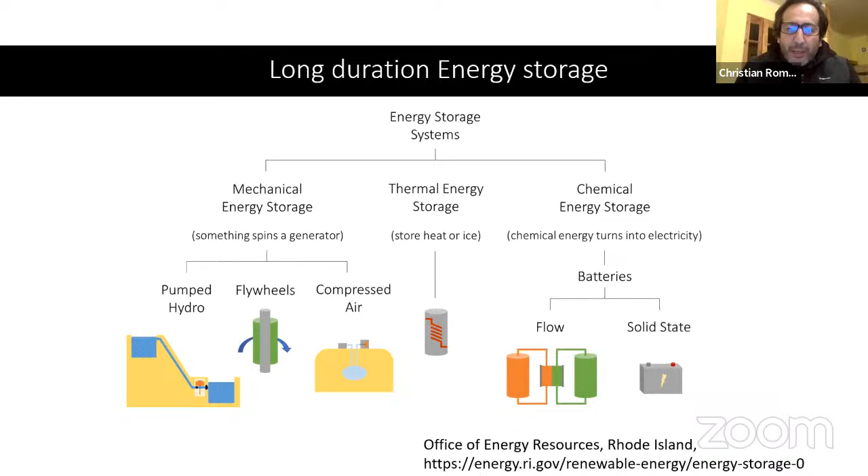For example, if you go to mechanical storage, you can have something like pumped hydro with compressed air, and anybody that has worked in these areas will know that compressed air, when you expand it, will cool down. So you can also throw thermal energy storage at that and make a pack of that. And if you can come up with a creative solution for this, you might be onto something.

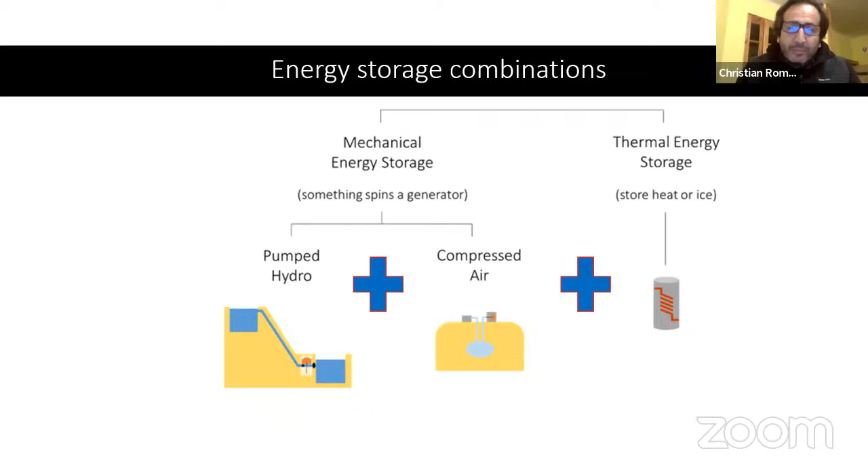So this is what many people have done, and I'm just mentioning some of them: hybrid thermal compressed air energy storage systems, adiabatic advanced systems, diabatic systems, droplet-based, near isothermal, liquid piston discharges, etc. So there's a lot of work in this area, and there's a lot of work for two reasons.

One reason is that there are people that want to make ultra high efficiency systems with these technologies, and other people want to make very basic systems with these technologies. And this has a lot to do with politics, with geopolitics, where if you can come up with a system that is simple and uses the available resources in your own country, you're never going to import energy technology again. So this is a pretty interesting topic.

So I want to make the case of CheX for you guys. It's compressed hydro energy storage. And as I just showed you, there are so many, we add the X to that. So basically, how does it work? When you have solar power, you take that electrical power and you store air.

When you have the air stored, you can store it in a mine or a gas well. When you need to produce power, you feed this air into a tank with water, and this air will push the water through a hydraulic turbine, spinning it up to produce power. When the first tank is empty, you feed the air to the second tank through a set of valves, pushing back the water through the turbine into the first tank. This way, you've created water pistons that feed the hydraulic generator to produce power.

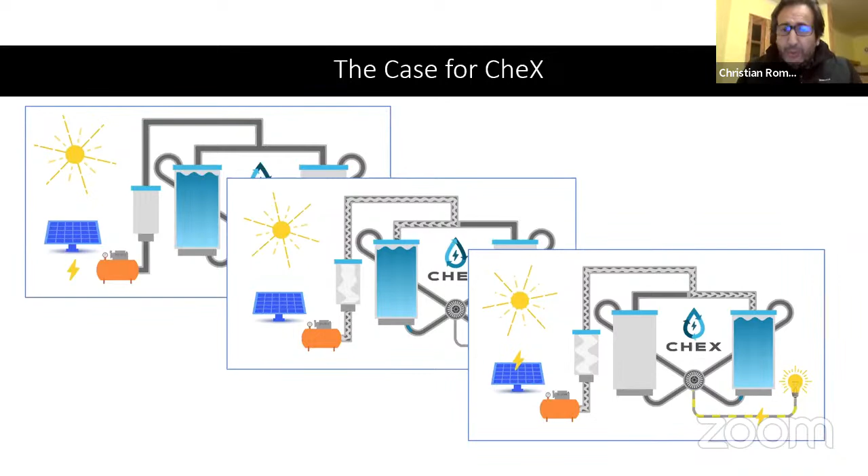You use very little water. As you can see, the solution has pipes, valves, tanks, air, and water. For this system, you don't need to import fancy turbines or things like that.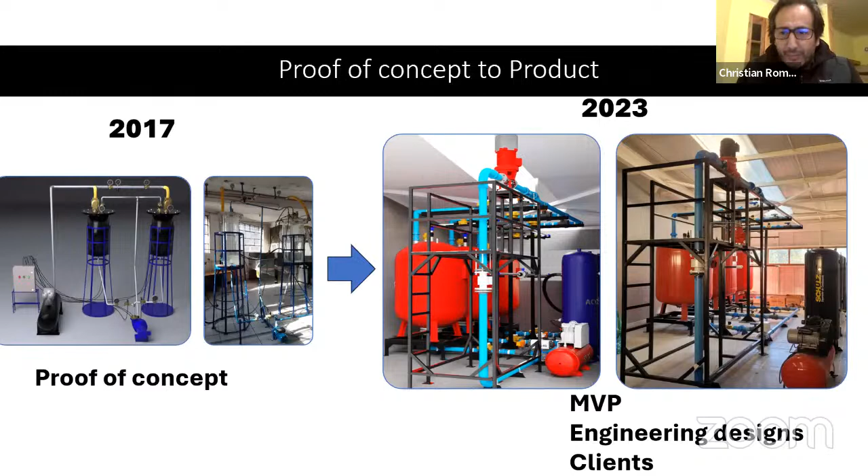So we got a proof of concept in 2017. Now, as the idea went out of the center and into the private sector, they have minimum viable products, engineering designs, and already clients. It may be a shocker, but some of the primary clients we have are all based in Africa.

We can use the underground infrastructure. In Chile, being a mining country, we have more than 7,000 kilometers of mining tunnels, and if we store air in that with our system, we can store 50% of all the consumption during the nighttime. We also know that we can use other underground infrastructure like depleted oil and gas wells. In North America, there are more than 2.5 million depleted wells.

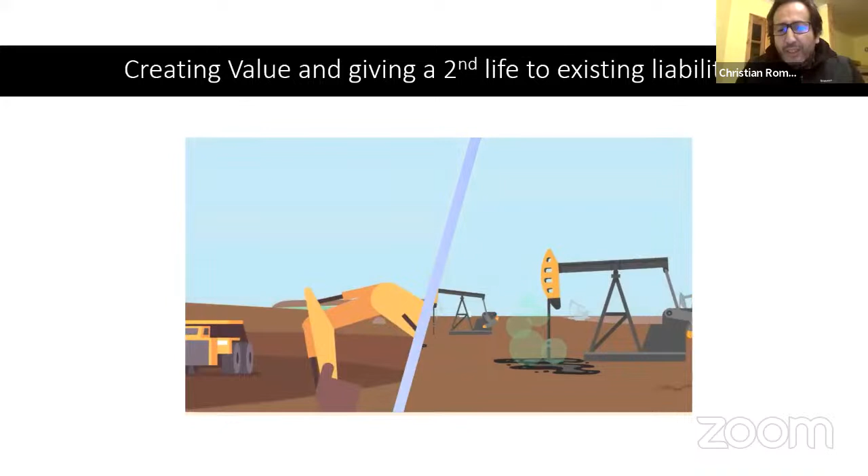What about the Gulf region or the rest of the world? There is a huge potential to use these stranded assets and give them a second life. Basically, what we're doing with this technology is taking things available in our own countries and transforming them into batteries for renewable energy. It's cheap, it's simple technology, and it creates new value for existing assets.

In many cases, the assets for the mines were a liability, and now we turn them into a renewable energy system.